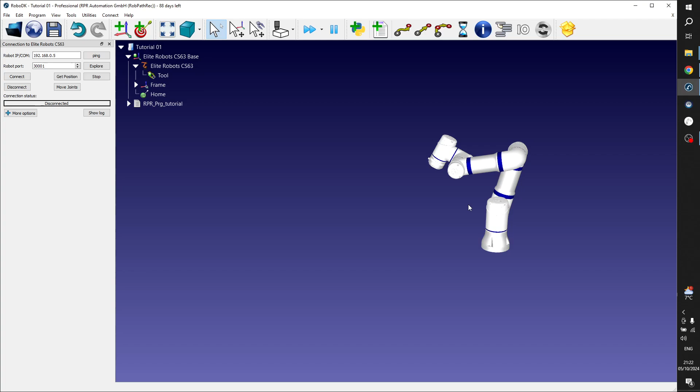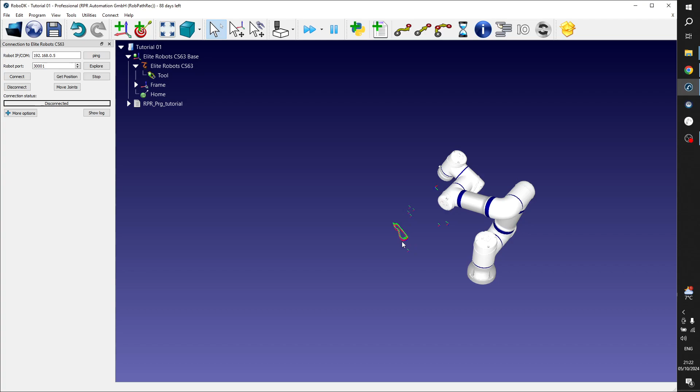Today I would like to introduce a feature and show you how it works if you want to improve the accuracy of a recorded path. It can be very useful if, after recording, you see a slight offset between the recorded path and the workpiece you wanted to create the outline for. This can also happen when you make a recording and then days or weeks later get new workpieces and experience a slight offset compared to the earlier recordings. You don't want to make a completely new recording for this, you just want to improve the accuracy by shifting the recorded points to correspond to the outline of your workpiece.

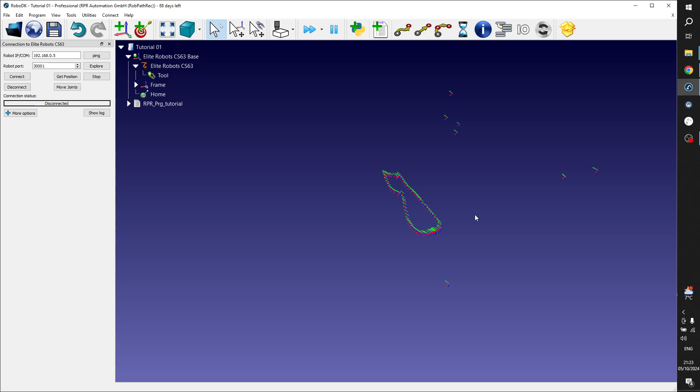Unfortunately, by today I don't have access to any robot, so I will show you everything only on the screen, but I opened up the connection panel as well. I will navigate you through which buttons to hit for the certain actions, so you can follow along even with the robot on hand.

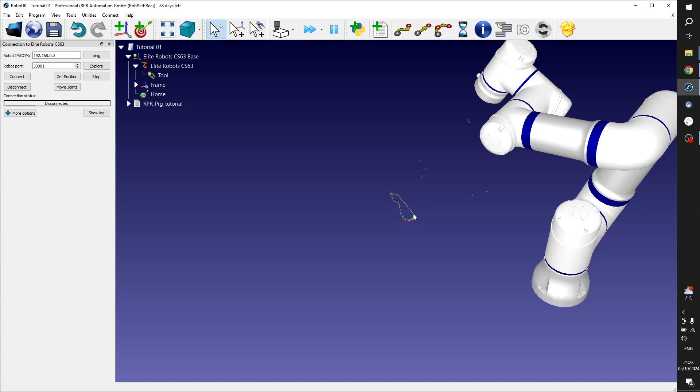For this demonstration, I prepared a recording of our calibration sheet with some artificial failure inside, and we recognize that there is an offset inside. I've chosen point 84 for this demonstration, so I just hit this point. You could choose any other one, but this region was not so busy, so I didn't choose a point from the busier areas. I chose point 84.

So I clicked it, and if the robot is connected and you hit the move joints button, the robot should move exactly to this point. This is the expectation. Before you hit move joints, please reduce the speed on the teach panel and always keep one hand on the emergency stop, since this can always have a problem or a failure.

Let's assume we see that the robot comes with the tool not to point 84, but next to this point. I already prepared this case here, which should not happen in your case. So the robot is staying somewhere next to point 84 but not exactly on it.

In this case, what you do is hit the get position button. From the real robot you will get the position where it actually is. But we really want to go to point 84. So with the jog mode on the robot, navigate exactly with the tool to the point where point 84 should be in reality. Once you hit the point, hit get position again, and RoboDK should get exactly the same joint configuration and position as what you experience in front of you in real life.

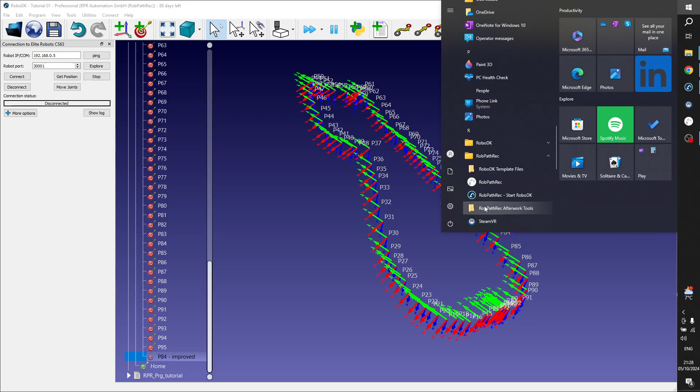For this you can open up one of our Afterwork tools. I'm using the software version with the old branding—the new branding will be called Easy Automator—and here you can find this folder with the Afterwork tools. You just open this up, and within the Afterwork tools you will find a couple of very useful features.

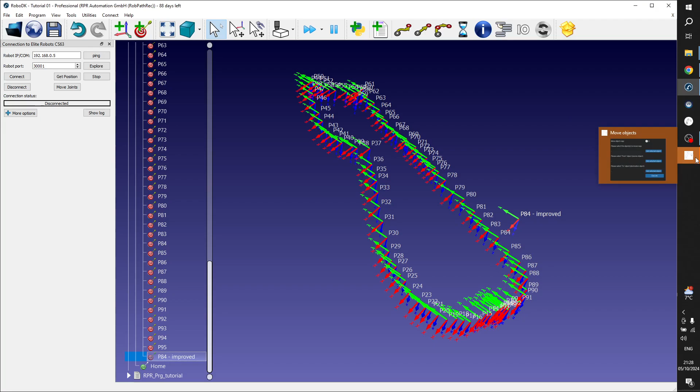We will use the Improve Accuracy Afterwork tool. Please keep in mind you have to have a valid license to use it, which is not in use for recording or for any other task.

Let me align the screen for our purpose. So here on the top you have a toggle, move or copy objects. If it's deactivated, we will move all of the objects. If it's activated, the original objects will stay where they are, and we will copy this entire path but with the shifted version. Right now I just want to move all of them, so I don't want to make a copy.

Then please select the objects to move or copy. You have a couple of options. Either you use the select options, and here you can see some points will be selected. If I hit get selected object, you can even see the name of the points I selected. If you press and hold the control button, you can add more points. However, I would really recommend against doing it this way, because you can see I just missed out some of the points, which is not so obvious.

So what you can do is select the first one and the last one you want to manipulate. Then if we select get selected objects, you see valid objects selected—there will be too many of them to visualize all of them name by name. So all of the objects are selected this way.

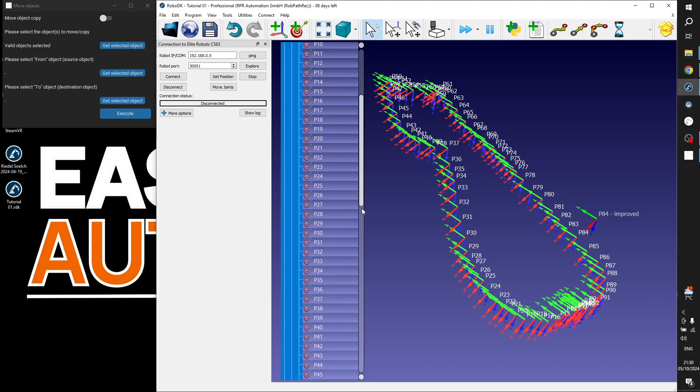Please select from object—this is the source object. This was point 84, the point where we started this investigation, and we've seen that we have a slight offset. So I selected point 84 again, and this is my source object.

And the destination object is the new one—this is the new point which we defined earlier with the physical robot, the improved one. So please select the destination object, and once I hit the execute button, all of the points will be shifted in the direction and with the distance so that point 84 and point 84 improved are exactly on the same point, and all of the other points will be shifted in the same direction.

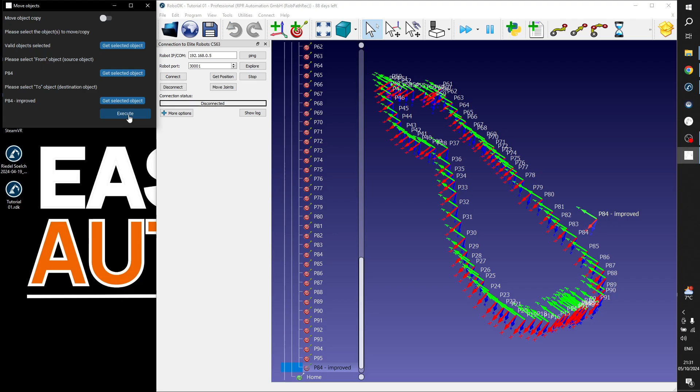So I just hit it. Bam, we are ready. Just to demonstrate, I'll make point 84 invisible, and there you can see exactly on the same point we have point 84 as well. So this worked like a charm, and we shifted all the points in the right direction.

Why is this so important? Because the program itself, which we created during the recording—including all the external parameters like smooth values, speeds, and so on—is exactly the same. As you can see, it's counting only up to P95, and this was the last real recorded point. So we don't need this one anymore—I can even delete it, and it's not added to the program.

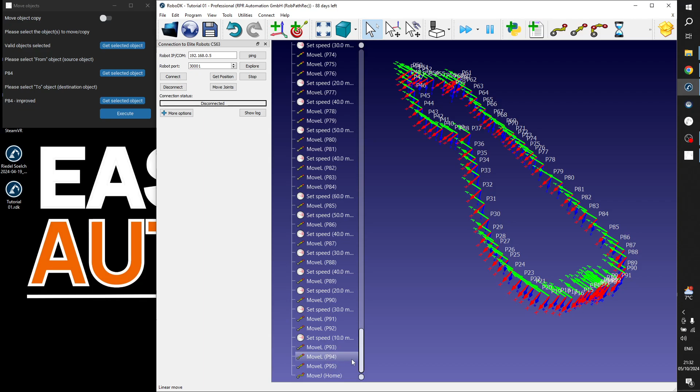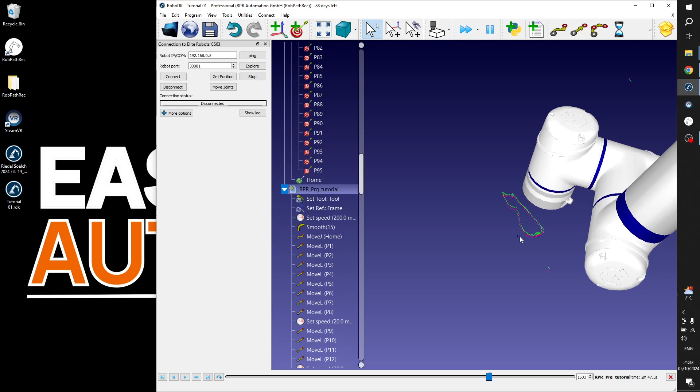That means if I double click it, you can see that the robot will exactly follow this new line with the shifted waypoints. Let's make it a little bit faster for us. Here you can see the tool is going through step by step exactly all of the waypoints which we just moved along.

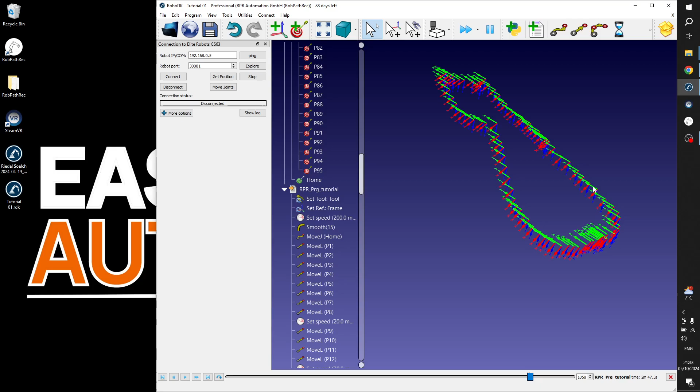In the next step, I will show you how we can make it even more accurate—if it's not just one single point to shift all of the points, but if you can really measure out, we can define a new reference frame. Even some rotations and other irregularities can be fixed via this method.

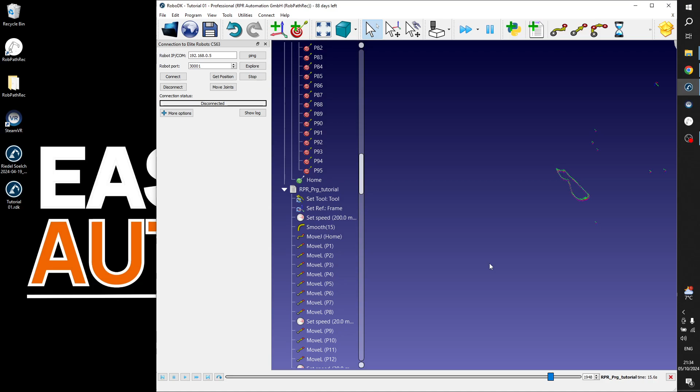From this point onwards, you don't have to do anything. You can simply rename the program if you want, then generate the robot program and transfer it via USB or FTP connection to your robot, and then you can start it from your teach pendant.

I hope it helps you, and as mentioned, in the next section of this lesson I will show you how we can even fix orientation and rotation problems. So, see you soon.